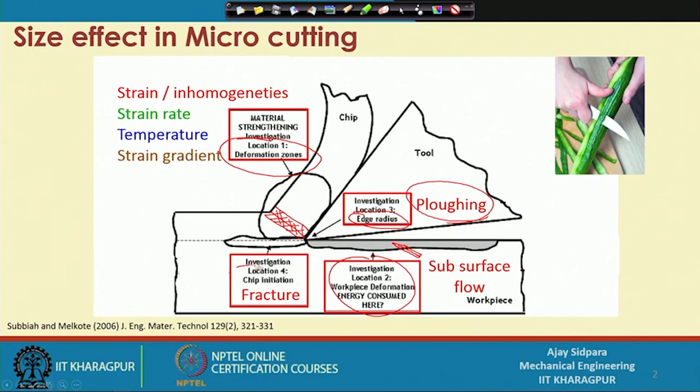And the last one was location 4, the chip initiation region. So when the sharp tool or blunt tool interacts with the material, it may create some type of chip initiation, because when it interacts at this particular location, deformation may get started from some location, and then it will propagate to facilitate removal of the chip from the workpiece.

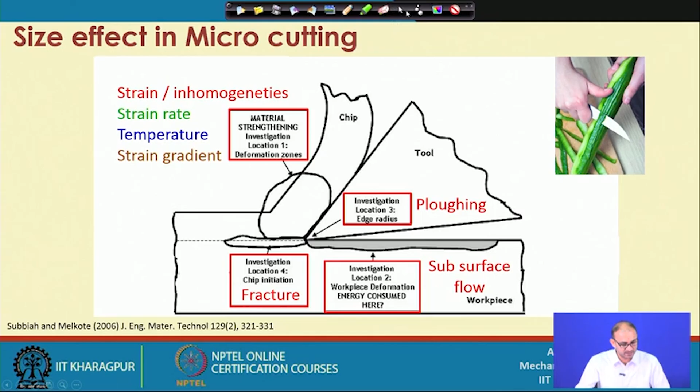So these are some of the things which we have discussed in the last class, and then we have seen what are the problems with applying merchant theory to the micro machining processes.

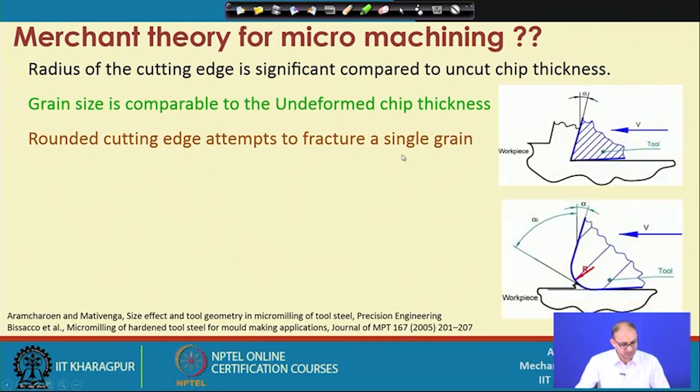And these are some of the things: the radius of cutting edge was very significant compared to the uncut chip thickness, grain size is comparable with the thickness, rounding of the edge also creates problems, and grain size is also creating problems. So those are things we discussed in the last class in detail.

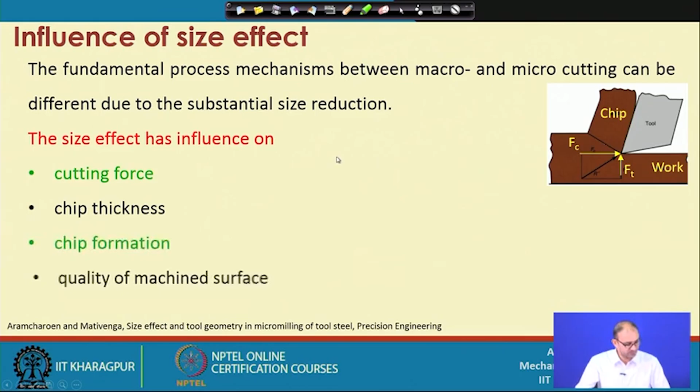And forces are also an important thing, because forces will create a problem when you machine a material at the micro scale, related to chip thickness and chip formation, and this thing we had discussed.

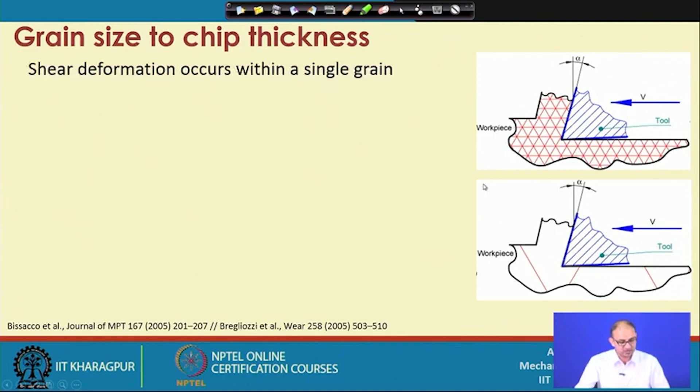And then we have seen that in micro machining, many times a single point cutting tool or milling tool will interact with a single grain, compared to macro machining or conventional machining, where a large number of layers of grains may pull out or come out as a chip without creating any problem during the machining process. But here it is not that case, and you end up with the machining or cutting of a single grain, and then everything depends on the orientation of the grain and the distribution of the grains.

And because of that, we have seen large fluctuation of the cutting forces, because sometimes you may encounter a grain boundary, so material removal will be very easy, and sometimes the grain is located exactly at the center of this particular thing, so you have to cut the grain. At that time you have to apply more force compared to cutting at the grain boundary. And because of that large variation in cutting force, many times you are not able to do machining at a stable rate, and at the end your tool will be broken.

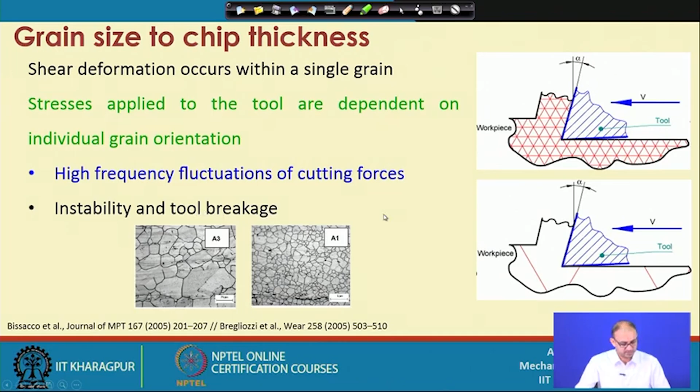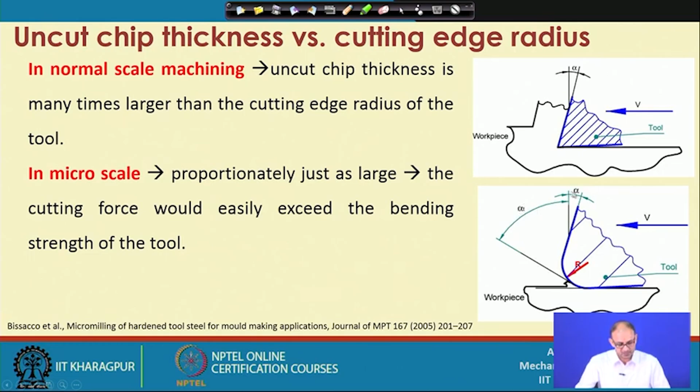We have seen the difference between the uncut chip thickness and the cutting edge radius. Because of this large difference, you end up with a negative rake angle. Your original rake angle was positive, but when you cut with a size reduction, you end up with the uncut chip cutting edge on the negative side.

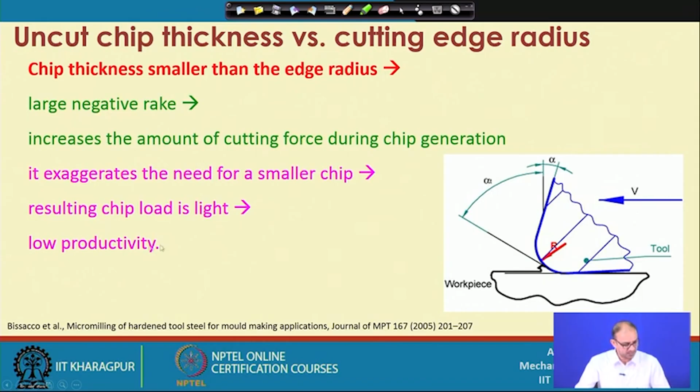These are the reasons for what happens because of the small chip thickness: you have to reduce the chip load, and when you reduce the chip load, you have to reduce the depth of cut, resulting in low productivity. To counter this, you have to operate the machine at a very high RPM to reduce the low productivity issues.

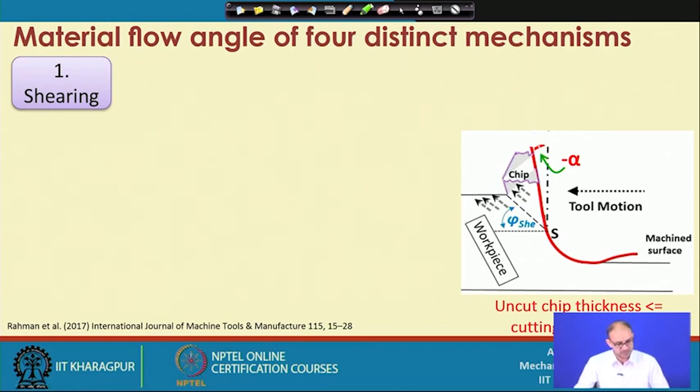Then we started with the 4 different mechanisms through which material flows, based on the cutting edge angle - the back rake angle, or the rake angle, or the orthogonal rake angle. There are many ways to define this. Right now the rake angle is very small on the negative side.

Then we will see in the next class what happens when this S point is moved at a different location along the cutting edge radius of the cutting tool.

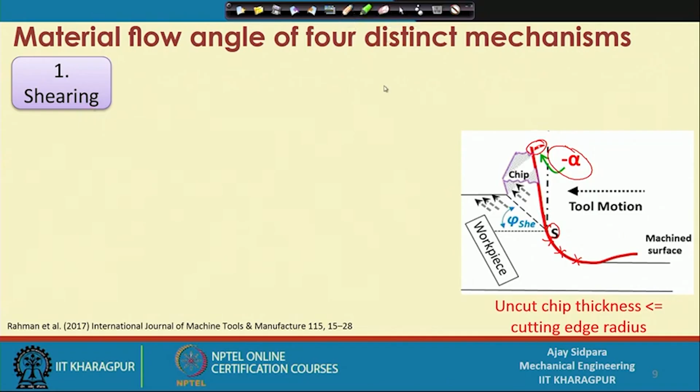We have seen that the first phenomenon we encountered is shearing. Shearing is important and required to remove material in the form of chip. The material is removed as chip, but some material also moves along the direction of the cutting tool motion, and that squeezes and becomes part of the chip in subsequent processing steps. This sequence occurs one after another, removing material in the form of chip.

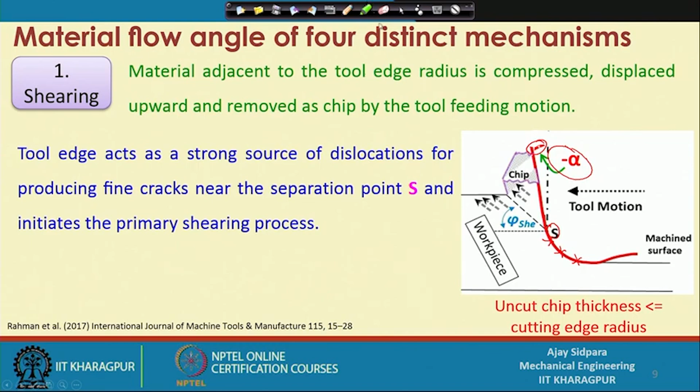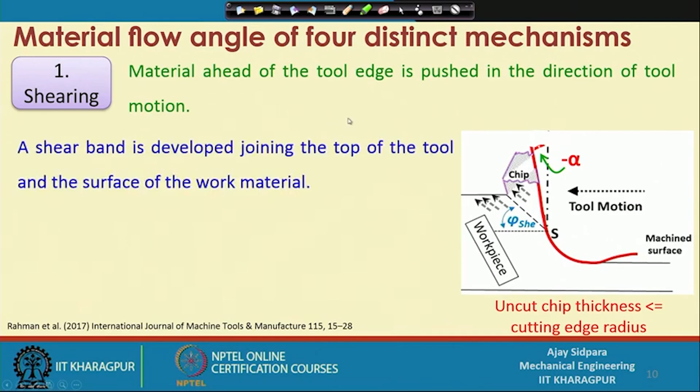So we completed the shearing portion in the last class. Now the second one is extrusion. What is extrusion here? We know extrusion as a metal forming process.

In metal forming, suppose you have a die and then you have material. This material will pass through this line, and everything will be squeezed away, and you will get a reduction in the diameter or the reduction in area. So this is the output, and this is the input material, and this is the die.

So what we are doing here is extruding the material to reduce the area - area may be radius or diameter, or the cross section of a square or rectangular section, whatever it may be. The same thing happens in this case, because the material extrudes through this part, and only a small amount of the uncut chip thickness comes out as chip, while the remaining material extrudes through the flank face and becomes part of the machined surface. Let us see the reasons for this.

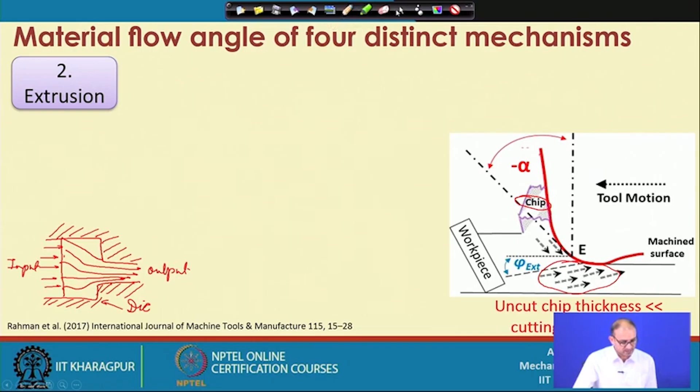So when we reduce further HC to R - so now our HC is this one, and whatever is this, this is the R. So what we are doing is reducing HC by R. Your R is much larger than the HC, so your uncut chip thickness is small, but R is very large.

So here, there exists a critical threshold of HC by R. What is this critical threshold for? It is to form a chip, because ultimately in machining we need chip, since we want to remove material from the workpiece. If you do not get the chip, you end up losing energy, with your effort resulting in just mechanical workout, not actual working. Because of that, you have to maintain this ratio in such a way that you get a chip, not just the flow or displacement of material from here and there.

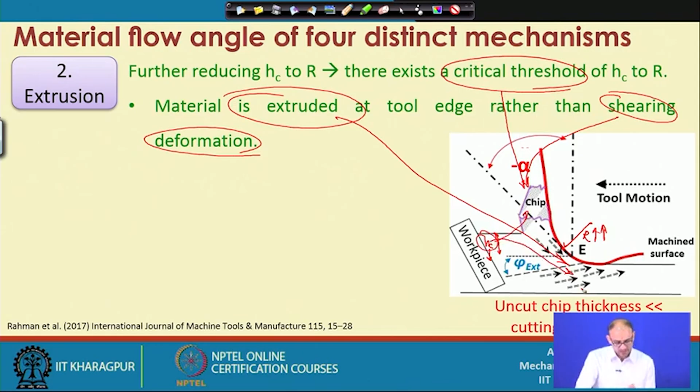So material is extruded at the tool edge rather than shearing deformation. What is shearing deformation? Shearing deformation produces a chip, and this material extruded part is the extrusion. So ultimately you are not removing all the material from the HC; part of this HC will go as a chip and the remaining part will go as extruded material on the machined surface. So how can you understand this phenomena?

This can be understood through the grinding process, because we know what grinding is. In grinding, this is the grinding wheel, and very small abrasive particles are located on the periphery. When it rotates, this is the workpiece, and as it rotates, it pushes the material in this particular zone.

This particular zone is the plastic deformation zone, below the machined surface. Now, how does this remove material? When a particular grain interacts with the surface, it creates a plastic deformation zone, and that zone continues to enlarge until you finally end up with a critical stress condition where the chip is removed as a small fragment of the workpiece material. So we can actually understand this phenomena, whatever is happening in machining, in the form of a grinding process.

Here also, our depth of cut is very small compared to normal machining processes, similar to grinding, and in micro machining also our depth of cut is small. So it is not a bad idea to understand this extrusion phenomena in the form of a grinding process. This is how it happens in this particular case.

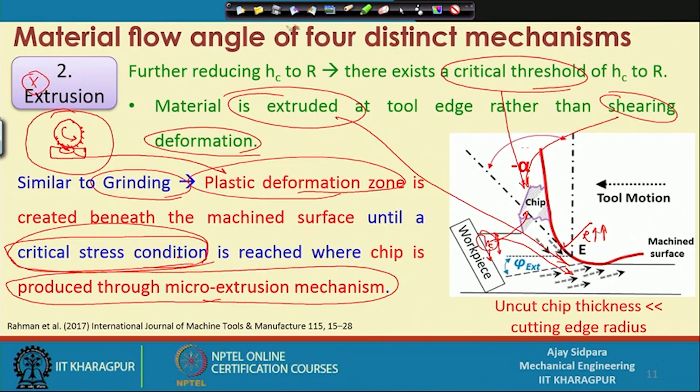So what happens in this particular case? There is an abrupt change in material deformation, with material flow in the opposing direction of the tool. The tool is moving in this direction, and our objective is to remove that material. This is the particular zone through which material deformation takes place.

Only a small amount of material is involved. This is our HC. Consider this small amount of HC: this part may go as a chip, and the remaining part, whatever is here, will be extruded into the machined zone. So all of this HC material will be deformed completely, but it may not come out as a chip — some of it will become the machined surface through the extrusion process.

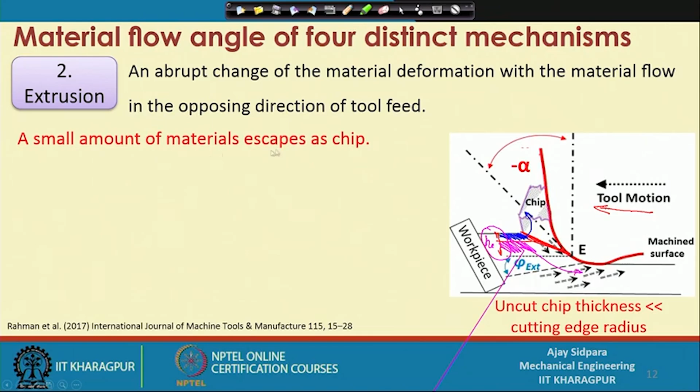The small amount of material escapes as a chip, as shown here, and the remaining deformed material is compressed by the lower portion of the rounded edge. What is the lower portion of the rounded edge? This whole edge is rounded, but we have divided it into two parts: the upper portion and the lower portion.

This is the E point, which is important to understand — this is the location through which you end up with two different phenomena, and you get a shear plane angle in this particular case. So some material escapes as a chip, while the remaining material is compressed by the lower part of this location, and then this material is compacted back into the bulk material to form the machined surface. So now where will this material go, because here you do not have any other option.

So, whatever is part of this particular thing, this will go in one direction and that will go in another direction. Now it will be compacted further, so here it will be a very compressed situation. In this case the surface property may also get changed, so if you are not intended to get a change in the property, then this particular phenomena is not advisable for micro machining operation.

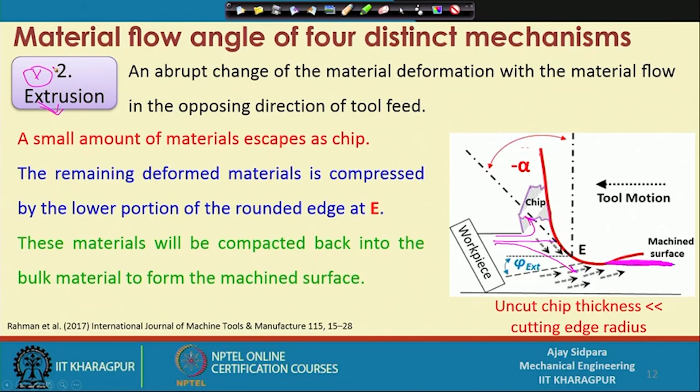Right, so now the third one is the ploughing phenomena. What is ploughing? Ploughing is the displacement of the work material by plastic upheaval on the machine surface at a higher negative rake angle. Let us see each of these terms.

So we know what is the higher negative rake angle. If you see from here, in the earlier case the point was somewhere here. Now we are considering that your alpha, the rake angle, is extremely negative in this case, so now our point of concentration is the P point. This is the negative rake angle, and displacement of material by plastic upheaval.

So now what is this thing, plastic upheaval? So this is the cut. Consider your cutting tool is something like this, moving in this direction. Now what we need is a chip to make this process efficient, but instead of a chip, what is happening here? Let me give this material a different color.

So this is the material displaced from this particular location, but it has not come out as a chip. Where is this material going? Some of it is displaced on both sides, and some creates this type of bulging. Once this bulging reaches sufficient height, some of the material will go in this direction and some in that direction, as shown by these arrows.

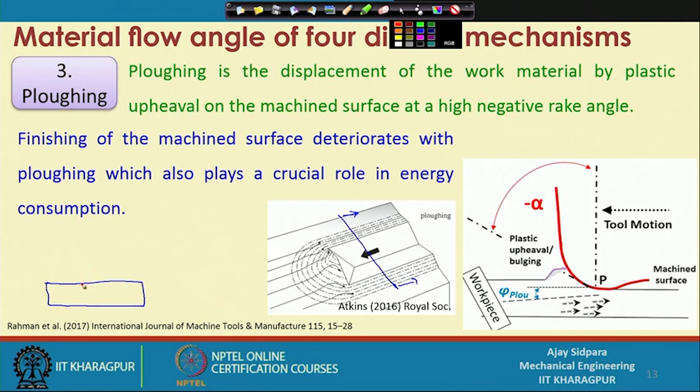Now let us see what is going to happen if we look at this cross section. This is your original surface, suppose, and this one is your tool. Now the tool has already penetrated up to this area, so this much amount of material, whatever is here, will be displaced somewhere.

Now consider this material is displaced to the side surface, so whatever is here, this is the ploughed material - this and this material. Now this part is okay.

Now let us see that your tool is moving to the next location. This part is over, and our depth of cut is this much. Now consider this is the depth of cut, and we want to remove some material from here. Let us calculate how much material we are removing from here, if you calculate this area - just a minute.

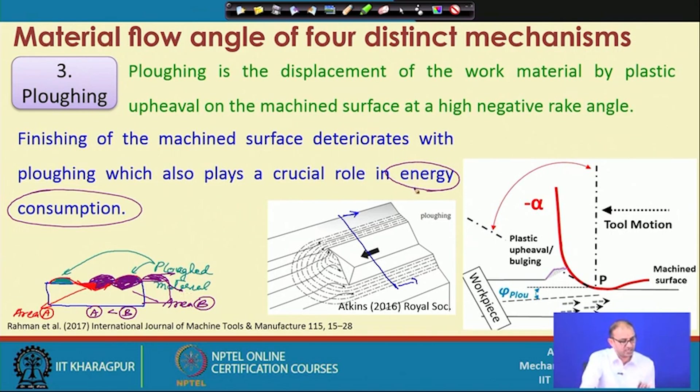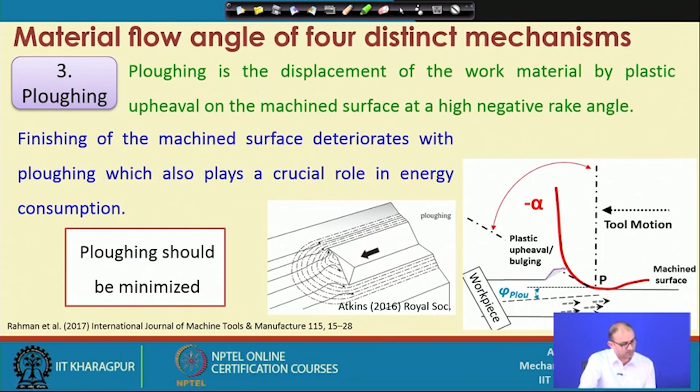So what is here is that B is bigger than A. In this next case your tool may encounter more amount of material, and because of that you have to spend more energy to remove that much material. It may continue, because whatever you are ending here, some of this material will pile up again even though some material is removed. It may fall down in this area also, and if you extend this workpiece then some material will be here also, and that is again called the plowed material. So in that way you are actually wasting energy without doing any efficient material removal from the workpiece. The final conclusion is that plowing should be minimized to get efficient material removal.

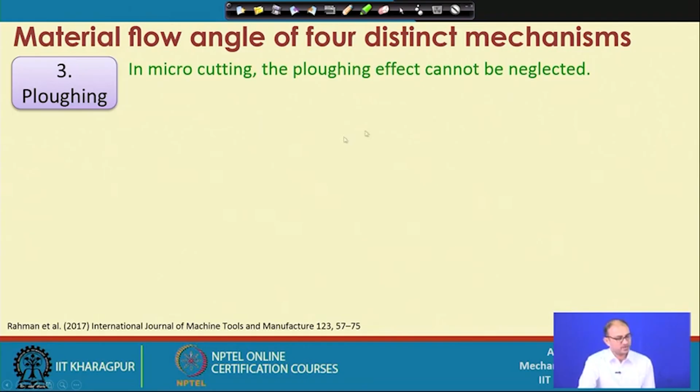Now what we do in micro machining - the micro machining plowing effect cannot be neglected, because whatever we do here you end up with a negative rake angle, regardless of the nominal rake angle, whether it is positive, negative, or zero.

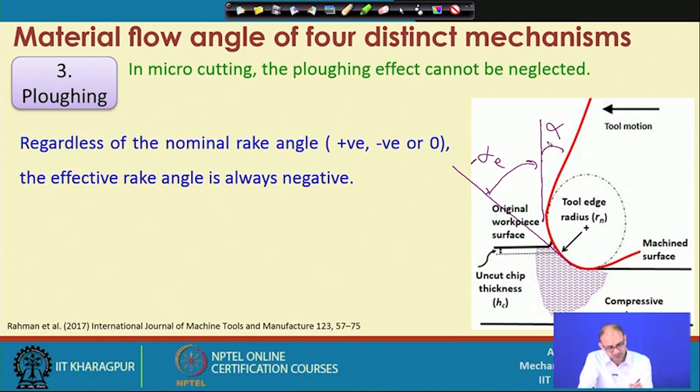So what is the nominal rake angle? The nominal rake angle that we are measuring is this one, this is your alpha. But when it removes the material, mostly it happens in this region, so this is your effective alpha. This is the negative part and this one is the positive, it may be zero also. If this red color line, that is the rake face, is a straight line here, then it will be negative. So whether it is positive, zero, or negative, your effective rake angle is always in the negative part. That is what is happening here in this case.

It causes the necessary compressive stresses to enable plastic deformation to occur in front of the cutting edge. So this is our cutting edge, this whole thing behaves as a cutting edge - wherever your uncut chip thickness is coming into contact and then leaving the machined surface, this whole part behaves as the cutting edge.

So now we consider that we are not treating our tool as a sharp tool, and because of that you get a compressive stress region in this location, in front of the cutting edge. This compressive stress distribution in the plastic deformation zone will deform the material, and then the ratio between the uncut chip thickness and Rn will decide what is going to happen - whether it will be removed as a chip, whether the whole thing will just be compressed through the machined surface, or some part will go as chip and some part as compressed or compacted material on the machined surface. So this cannot be neglected.

Let it be even smaller depending on the radius of the cutting edge and the uncut chip thickness, but some material will still be plowed at a later stage. So we have to optimize our machining parameters - speed, feed, and depth of cut - in relation with the uncut chip thickness and the cutting edge radius to get efficient material removal.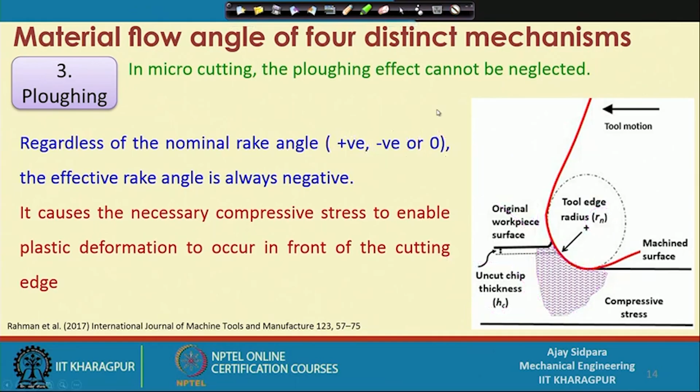Now, the fourth phenomena is rubbing. By word only we can understand what it means - rubbing means when you rub two surfaces with each other. That is called rubbing, and there is no material removal.

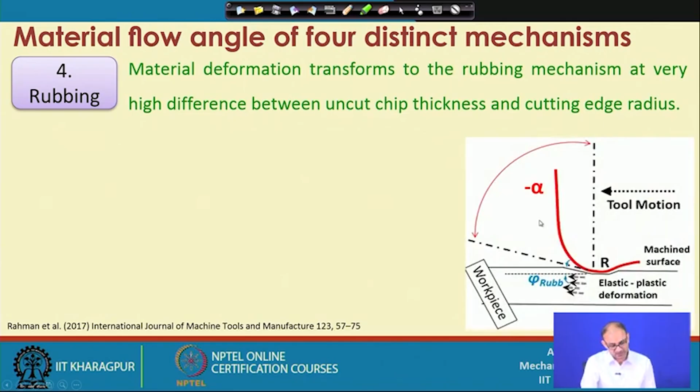Now let us see how we can see this thing in the machining zone. Consider your alpha is even much larger than the earlier case. Now this is your alpha, and what is happening in the rubbing?

The material deformation transforms into a rubbing mechanism at a very high difference between the uncut chip thickness and the cutting edge radius.

This is our cutting edge radius, and this is our uncut chip thickness.

So now what is happening in this particular case is that HC is very, very small, and we are considering this R point - it is further located towards the flank surface, not the rake surface.

So if it is located here, your tool is moving in this direction, and no material is located on this particular edge.

So there is a chance that most of the material will just be compressed, with no material removal in this particular location. So your material deformation transforms into the rubbing mechanism.

Rubbing mechanism means you are just rubbing two surfaces - one is the tool surface and another is the workpiece surface - and the whole thing moves as an elastic plastic deformation of this particular part.

Now, the cutting tool rubs along the workpiece surface - that is what is happening at this particular location. So this is the location at which the rubbing is happening.

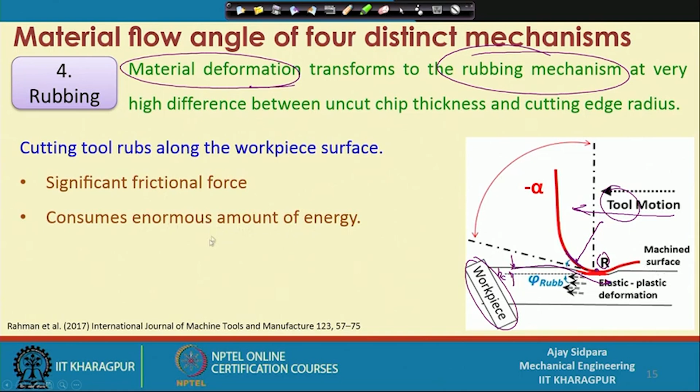This is because it is elastic plastic deformation, so no material is removed in terms of chip. The material is just getting compressed and finally becomes part of the machined surface. That is the reason for the high energy of the machining process.

So this thing is also important. Here, suppose in some extreme cases there is no chip formation initially. What happens in this case is suppose you continue in this rubbing phase.

Sometimes you do not know what is happening at this location, and you continue the machining operation expecting material removal and cutting, but actually the process being performed is rubbing.

So if you continue in these cases, initially you will not get any chip removal. But what happens is that later, if you continue, this particular region will be highly compressed.

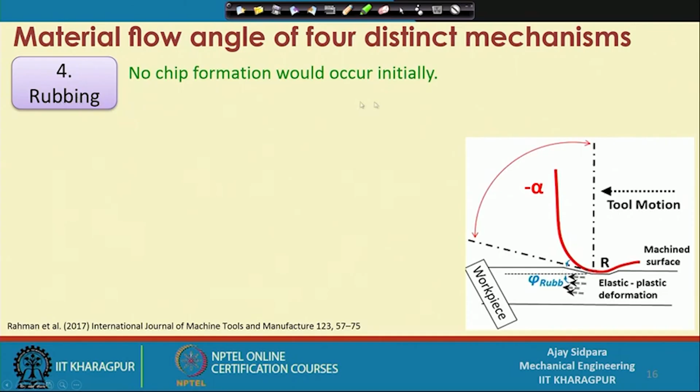Now see, this particular region will be highly compressed, and because of this rubbing, your tool surface motion is in this direction and your workpiece material is coming from this direction.

So later, if the operation continues, it will create some extra material here, and then this particular rubbing region will continue to grow.

If you continue this growing, at one particular instant, the size of this thing becomes so high that it will move as a chip. But this happens rarely, and sometimes only after a long time.

Most of the time you have already consumed most of the energy in this deformation without any removal, and that is not correct for making this part. So it gets accumulated at this location and approaches a minimum chip thickness value required to form a chip.

Once it reaches this particular location, you can remove the material by the moving tool in this case.

So what is the conclusion of this rubbing step? Rubbing deteriorates the surface quality significantly. So you should avoid the formation of rubbing or reaching this rubbing location when making decisions about the cutting edge radius and the uncut chip thickness.